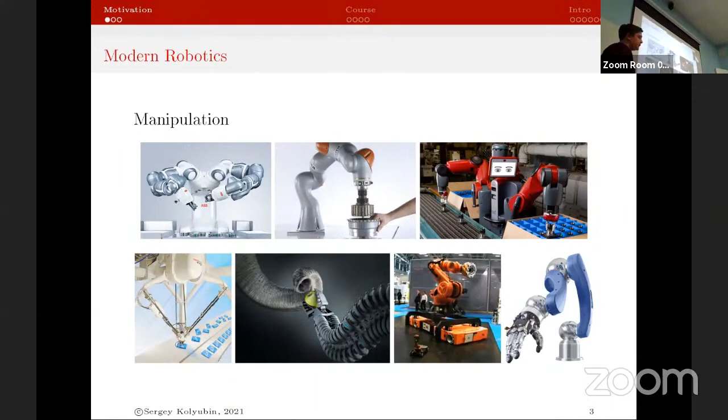The other big group of robots are for locomotion, right? So we have walking robots, jumping robots, flying robots, swimming robots, and also wheeled robots, right? And there are also other tasks related to energy efficiency, stability of locomotion, and so on. And here for cars, for example, it's also a good example to consider.

If you talk about an autonomous car, which is definitely, for now, a kind of a computer on wheels, right? More and more. Or it's really a robot nowadays. Even a car with, let's say, an ADAS system of level 2 can be considered as a robot, because there are so many systems: driving by wire, cruise control, adaptive cruise control, ABS systems, many kinds of mechatronic systems altogether. So quite often kinematics is enough. For example, if the car is moving straight, no turns, constant speed, you don't care about dynamics.

But think if you need to make a fast turn, or let's say your computer vision detected some obstacle on the way, and you should change the lane, and you need to do it fast. In this case, you care about dynamics, because if you do not plan your trajectory properly and you do not plan your control actions, which are acceleration, deceleration, and steering wheel commands, then you can have rollover, or you have some drift. Your car will move away from the road, which is not what you expect, right?

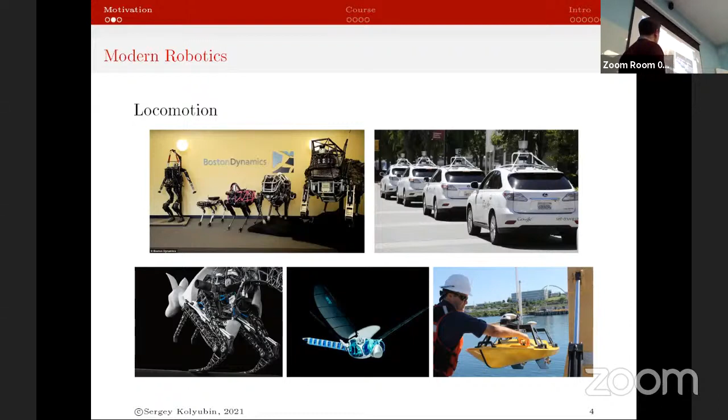Okay, so before we move, let me check what you think here. I will show you some video later on, but before we do, can you answer the question over here? Why do you think we need to know dynamics? And I will start with an even simpler question. What do you think dynamics is about? What is the main difference between kinematics and dynamics?

Because both are, let's say, chapters in mechanics, right? You already had a course on kinematics, so you're familiar with rotation matrices, homogeneous transformation matrices, coordinate frames, and so on. But the question is, what is so special about dynamics? It's all about motion, yes, but what is the difference exactly?

Sorry, say it again. In kinematics, we're concerned with the kinetic energy only. In dynamics, we're concerned with the mechanical energy, with the potential energy and the kinetic energy. Okay, other options? There is force and the other doesn't have it. Force, okay. So for some you have forces, for some you don't.

Other opinions? In kinematics, we speak only about the position, from position to position, how the robot will be moved. But in dynamics, we have to consider the physical properties of the link or something else that affects the motion of the robot. Okay, I see a hand in Zoom. May I answer? Go ahead. Dynamics is about what causes motion. Yeah, that's I would say the most precise answer.

So the major difference is that kinematics simply describes the motion without describing the reasons of motion. Dynamics is about describing the reason of motion. And you mentioned forces, that's also correct, because the reason of motion is force or torque. So for dynamics, we will consider something like this. Let's say this is our robot.

Here's the input, which is force or torque changing in time, and the output is the motion itself, which can be described by generalized coordinates, generalized velocities, and generalized accelerations. So this is a kind of causality: reason, consequence, input, output. And dynamics is about what is in here: what are the input to output relations?

So the other question from my side: the task is to find input to output relations, or vice versa, because, as we'll discuss later with forward and inverse dynamics, sometimes we calculate one way and sometimes back. But the question is, what are the ways to derive these relations?

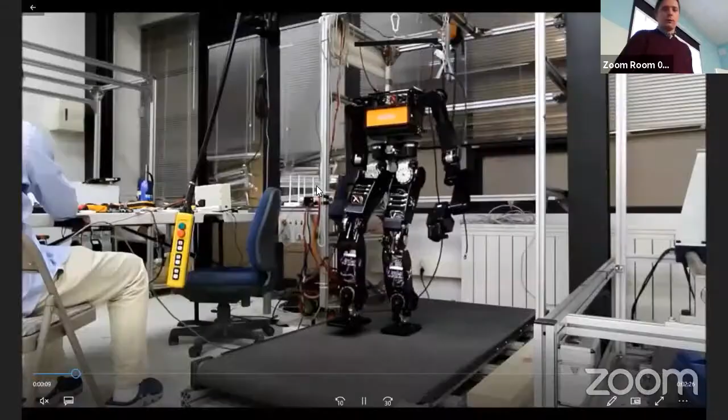So, and here we deal with dynamic balancing. This system is dynamically balanced when it's moving. I think this is from the Hubo lab in KAIST in South Korea. I've been in this lab in 2016.

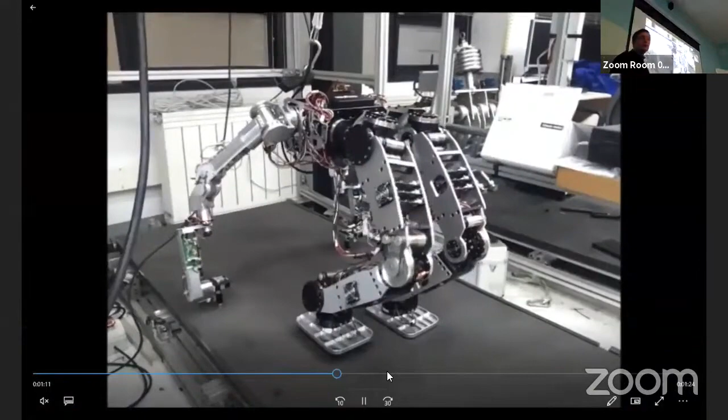Yeah, and there are different control modes for the walking robot. Somewhere there will be examples of dynamic balancing. But you see that this robot is moving more human-like. So this is called dynamic walking, and this is called dynamic balancing, right? Dynamic balancing is keeping the position when somebody is pushing the robot. It changes its configuration such that it still does not fall down.

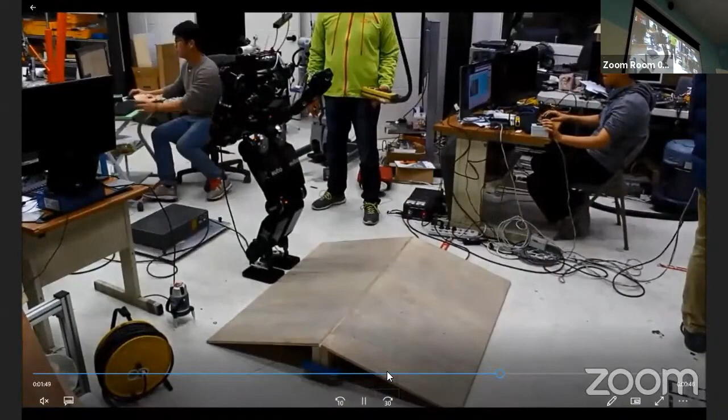And dynamic walking is also because the typical way of controlling the walking robot is so-called ZMP, zero moment point, right? So you're finding the stance where there is no moment in the foot, so there's no roll in the foot, right? But then it becomes like that. You've seen robots that are moving like this, right? So this is because of the ZMP approach.

But if you have robots that are moving more like in the video, then we talk about dynamic walking, and then you need to know dynamics. Because there is the moment, and you need to change the configuration such that it does not fall down, okay? And also in the names of these tasks, dynamic balancing and dynamic walking, you see that it's related to dynamics as well. Okay.

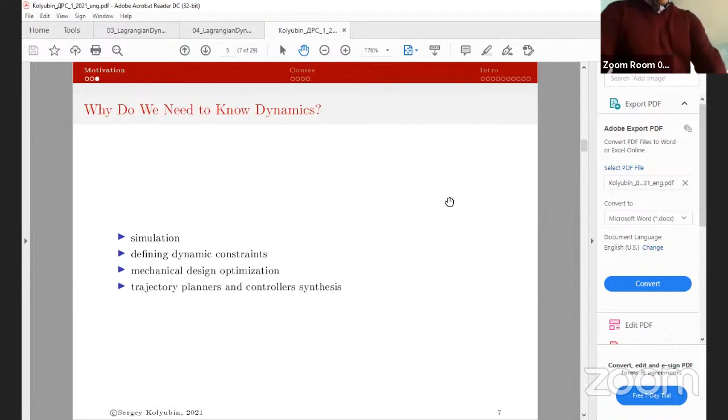And here's a kind of summary of the tasks where we actually need to know dynamics. One is simulation. If you want to build some computer model of your system, you need to do simulation. You need to understand how to derive equations of motion, right? I think the course before our course was actually about simulation of robotic systems, right? And there you played around with some visual programming, I would say. So you had some ready-to-use blocks, right?

So you connected them, but sometimes you still need to program a differential equation inside the block such that the properties of the built block will actually be the properties of your physical system, right? Like a spatial spring, or some kinematic pair moving with some mass distribution and so on. Okay, defining dynamic constraints.

What does it mean? Here we talk about, let's say, what are the maximum accelerations? What are the maximum velocities given actuator constraints? Because for any actuator, you have limited output torque or limited output force. And we know Newton's second law, right? So in the simplest case, it will be F equals MA, right? Here it's easier because M is constant.

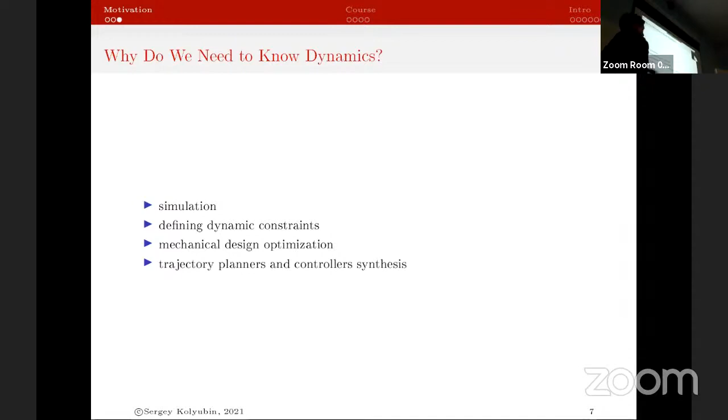Or other ones. There are some similar techniques for hitting motions. For example, if you need to hammer something, how to plan the trajectory. Or what else? If we talk about mobile robots, for example, we already mentioned quadcopters. How to plan a trajectory for a quadcopter that can fly fast, right? And not hover all over. This is also about trajectory planning. So there are things like that.

Okay, within the course, we'll focus on regular dynamics. We'll consider mostly rigid body dynamics. I will give you some examples of flexible joint robots, but we will not consider elastic links. We do not consider moving in fluids, like swimming robots, for example. We do not consider PDEs, right? For systems like that, we'll only use ODEs, I mean ordinary differential equations, as an analytical tool for solution.

Okay, and also we consider only systems from classical mechanics. We will not consider motion with the speed of light, right? So let's avoid it for now. We don't consider quantum systems. It's not quantum mechanics, right?

So it's classical ones. And these bullets are the major topics within the course that we'll study. Today we discuss tasks and some basic principles in dynamics that will be used further. And if we have time, we'll discuss the Euler-Lagrange method. And also along the course, we'll consider Newton-Euler, and we'll consider full body dynamic control of robotic systems. Okay, this is the plan.

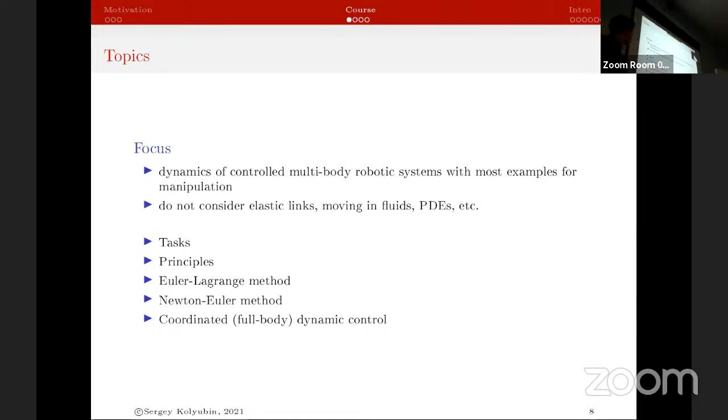And also as an extra, you can make a live script in MATLAB. It's a kind of mini report describing some steps from your calculations. For example, I used this formula over here, and this is the chain of algebraic transformations that leads to this relation for the Lagrangian, right?

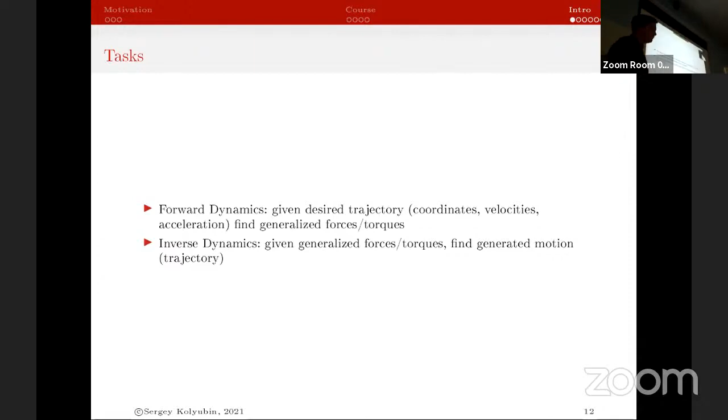Okay. So, in addition to some, let's say, high-level tasks, forward and inverse, we also have some practical tasks, or applied, let's say, some application examples. The first one is force torque calculation. What it means, one of the understandings can be: please find the control actions that are needed for our robot to follow the desired trajectory. It means please solve the forward dynamics task.

But also it can be about finding reaction forces in kinematic pairs, because again, you remember that we already mentioned the design optimization, right? That is also important. So you plan some trajectory, and then you forget about the control forces. Assume that you have the control forces that are needed to follow. But what will be the reaction forces in kinematic pairs along this trajectory? For example, if the magnitude is too high, then probably you have a crash.

But sometimes it's not only about magnitude, but it's also about the shape. If the reaction force is changing very sharply, then if you have, let's say, some gears, you can have backlash in there, and then there will be wear and tear inside, which is also bad in terms of mechanics of the system. So this is the FT calculation.

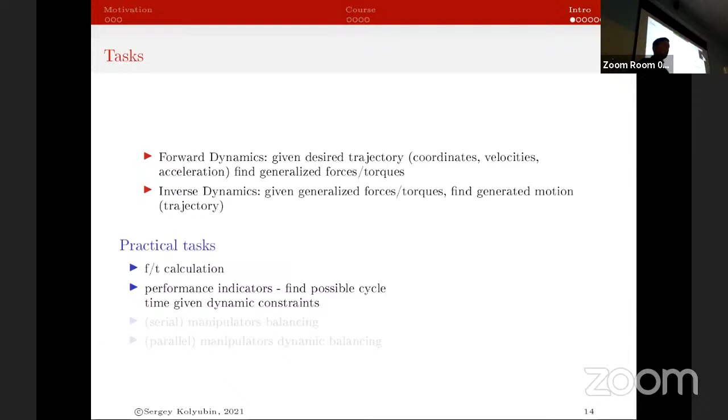So, for example, if you do some optimization in trajectory planning, you calculate some cost function. But if you really do trajectory planning which takes into account dynamics of the system, to calculate the cost function you need a dynamical model of your system. Otherwise the cost function cannot be good. Also, if you do some constrained optimization, in order to impose constraints, you also need to know dynamics of the system, right? So what else? Balancing.

Let's call it static balancing. The first one is about static balancing. Static balancing means removing some static forces, unloading actuators from static forces. It can be done in different ways. One of the ways is kinematic decoupling. And to do kinematic decoupling, you don't need to know dynamics, I would say, right?

So this is an example of, are you familiar with this abbreviation? SCARA? SCARA robot, right? What is so special about the SCARA robot is that all the rotational links of the SCARA robot are moving in the horizontal plane, while the gravity forces are acting in the vertical, which means that the action from gravity, which is a static force, is decoupled from the motors, because the torque of the motor is in this plane, but the force is in this plane.

Which means that the motor shaft absorbs all the payload, but not the drive itself. This is a kind of metal, not electricity, right? So you do not spend extra electrical power to compensate for gravity, but instead you use material, the resistance from the material to do that. This is kinematic decoupling, but it is not possible to apply kinematic decoupling for all kinematics.

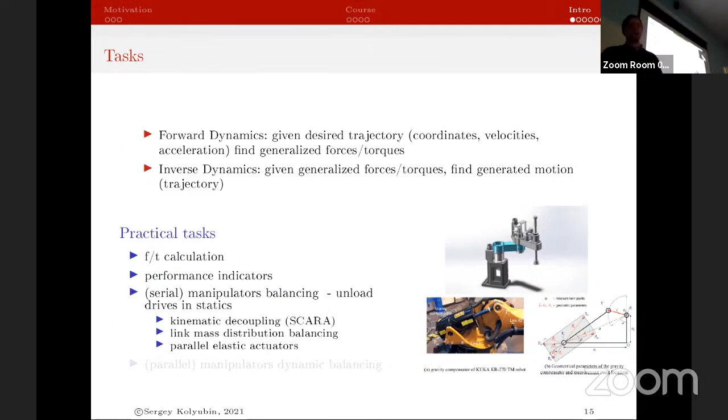That's important. And the last one is so-called dynamic balancing. When we talk about static balancing, we're talking about removing gravity. But with dynamic balancing, we talk about removing the influence of centrifugal, Coriolis forces, and also inertial forces. Usually it is done by putting some counterweights.

Let me show you some video. I started here. Sorry. Where is that? Okay. You see it, right?

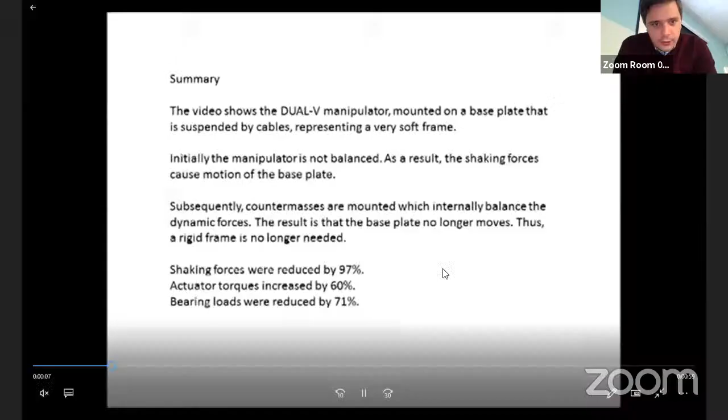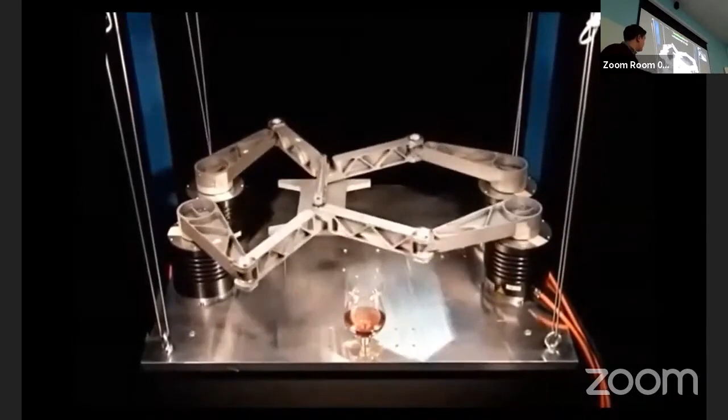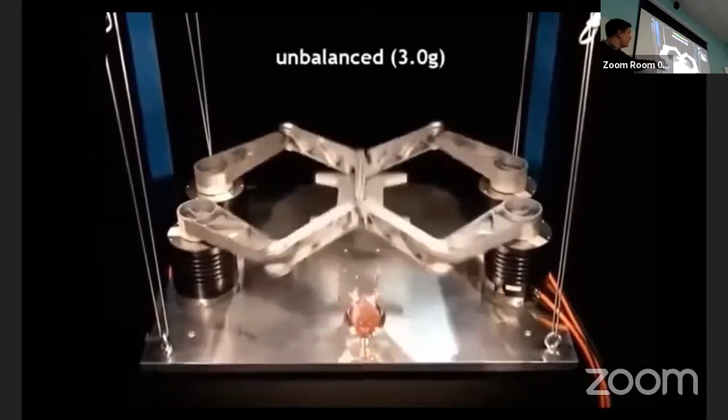Here's the parallel kinematics robot. This is the, let's say, suspension mechanism. So here you see just tendons, so it's not fixed in space. And therefore, when the robot is moving with different accelerations, from 3G along different axes, you see that the liquid inside is moving, right?

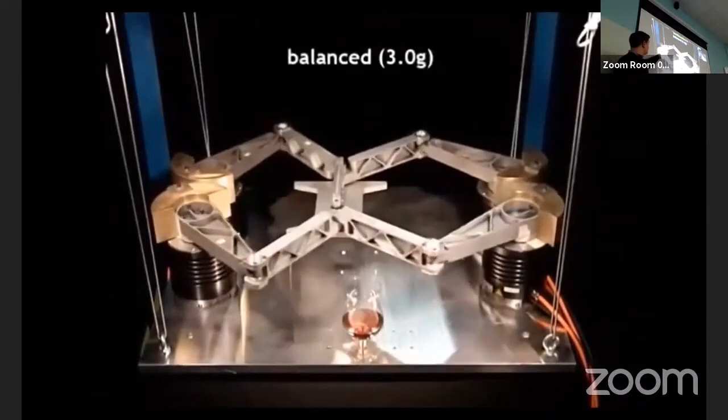Because the platform is shaking. This is unbalanced, right? And then they balance this one. You see that they put some counterweights over here, right? And it's not shaking anymore. This is the balanced system. After they change the acceleration to 10G, it still doesn't move. So this is balance. You understand, right?

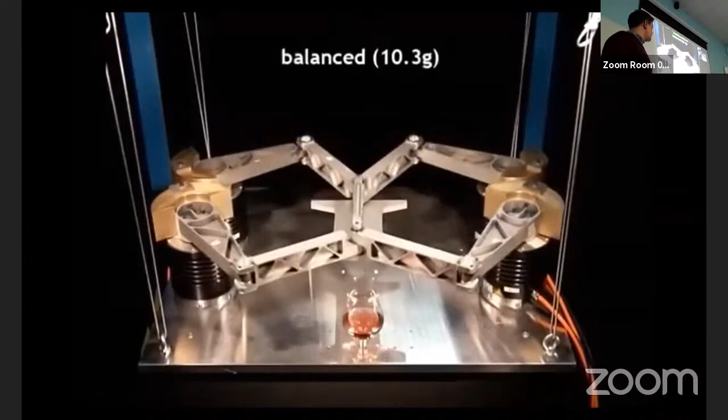So, as we discussed before, let's say you have some robot on a moving platform, or you want to avoid some extra reaction forces, then you need to do dynamic balancing. Do you have any guess on how it was done? Because it looks very easy. They put some counterweights. How to calculate the mass of these counterweights and the shape of these counterweights? Do you have any guess on that?

To remove Coriolis forces, for example. The change of the center of mass. Okay, that's correct. How to change it? Where should it be placed such that we avoid the Coriolis forces? Or the actuator... it's not the actuator, we should put it at some specific point. In the point where the torque is computed. Okay, so this is the axis of rotation, actually. So the center of mass should be placed at the axis of rotation. If you do that, then we remove all the Coriolis forces from the system, okay?

So this is quite a simple trick, right? For these kinematics, this is kind of easy, because it's just two links and two links and two links, you just put some counterweight. But if you have a multi-body serial kinematic chain, how to do that. By the way, I showed you some examples during the practical classes for the 5-bar linkage, how to shape the mass distribution of the 5-bar linkage such that you remove all the Coriolis forces from the system. Okay, so let me go back to the slides.

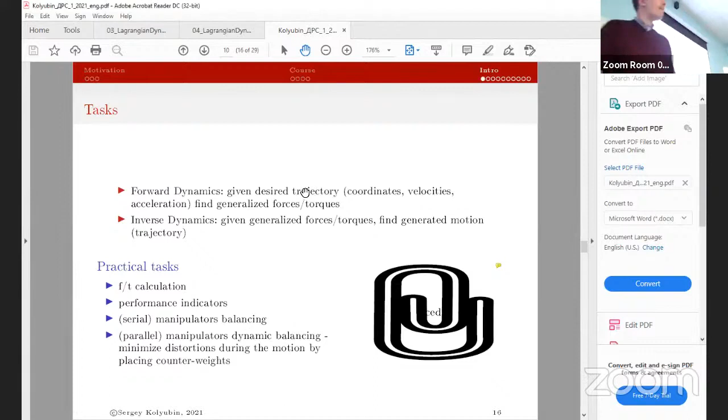Actually, I have a question regarding serial. I understood your idea about SCARA, but there was written kinematic decoupling. What do we mean by decoupling? Decoupling means that control torques are decoupled from the gravity torques or gravity forces. Let me put it this way. Let's say we have two vectors, one force and the other force. If you want to calculate the scalar product of these two, when will this product be equal to 0? When the angle is equal to 90 degrees.

Yeah, the angle alpha should be equal to 90 degrees, pi over 2, which means that we should make it orthogonal. And this is what we basically do for SCARA, as I mentioned. The forces of actuators are acting in the horizontal plane, while the gravity force is acting in the vertical. Therefore, it's orthogonal, so this is decoupled. By decoupled, I mean that it's orthogonal, so one is not affecting the other one.

So if you have a car with automatic transmission... but if you have a manual transmission, then you have an extra pedal, right? The clutch. When you push this one, you decouple your motor from your wheels. This is what decoupling means, right? And here we do it like that. Basically, we make it orthogonal, and then the scalar product of these two will be 0. Therefore, one does not affect the other one.